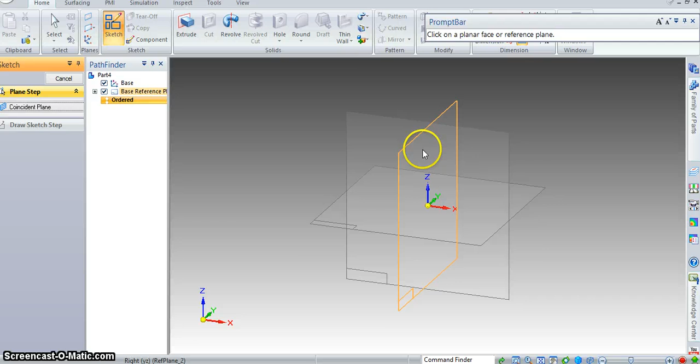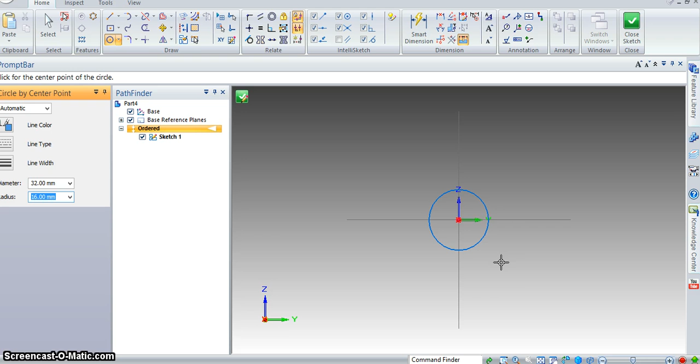I'm going to start sketching on this. I think it's 32. Yes, 32 and 16. Diameter 32. Let me zoom in a little bit.

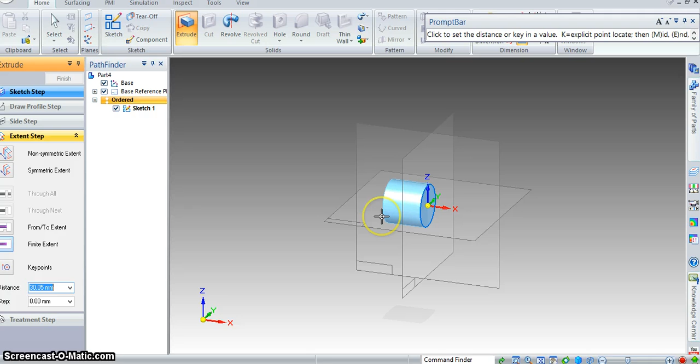Now I need to extrude this for 56 mm. I accept. Now, it's useful to have both cylinders in the center. If I make it so that it's 56 on this side, the second cylinder is going to come about here, and it's not going to be in the center at the origin.

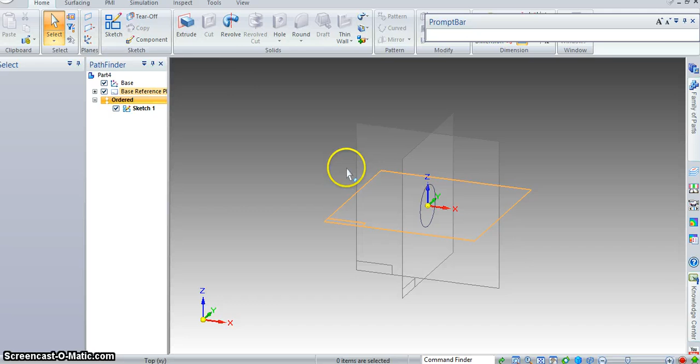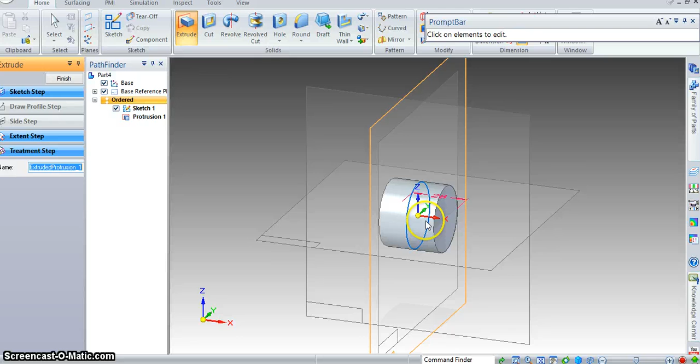So what I'm going to do is extrude it in such a way that it's symmetric. How you do that is this way: what's actually selected now is non-symmetric extent. I'm going to make it symmetric, and the distance I need is 28 on each half. I believe Solid Edge asks you to input the distance on each half. Let's see - no, if you see, the entire part is 28, and that's not what we need. So we need to input 56 itself as our distance.

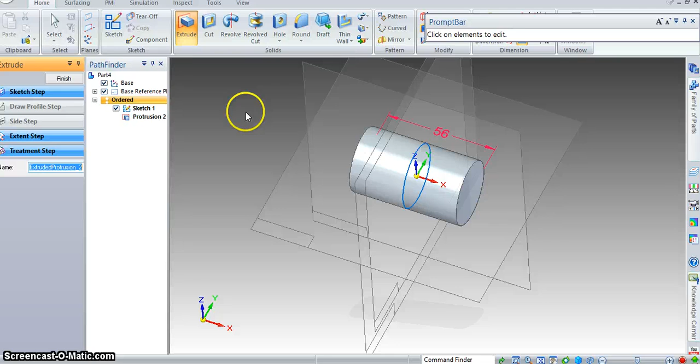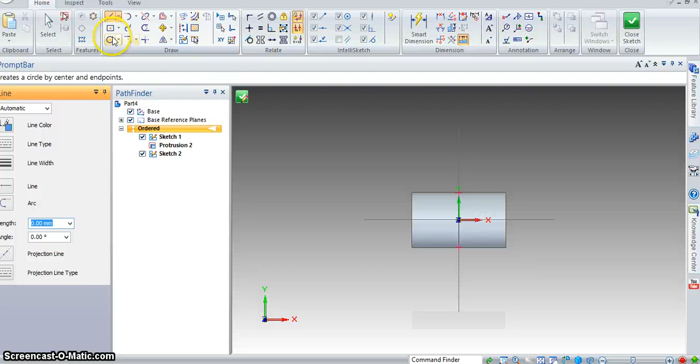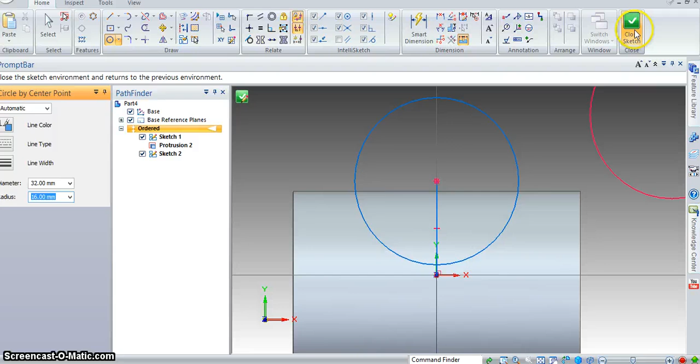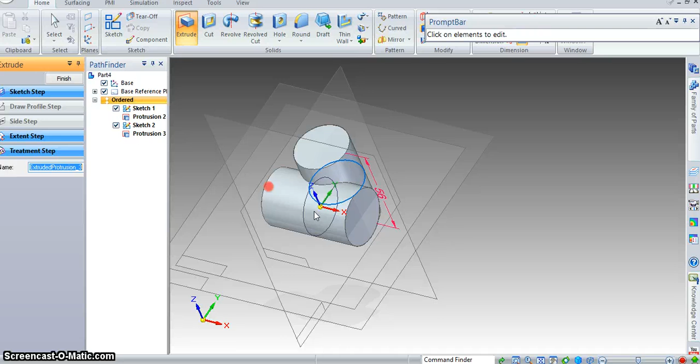56, but it's symmetric. There we go. That's one cylinder. The second cylinder is going to be perpendicular, so I'm going to choose a perpendicular plane, but it's at an offset, not at the center - an offset of 18 millimeters. So I'm going to draw a construction line in the center, 18 mm out, there, and that's our center. We need a circle with diameter 32, and I can go back to the 3D. Okay, do the same thing, except symmetric extent 56. Symmetric. There we go. That is what the center looks like.

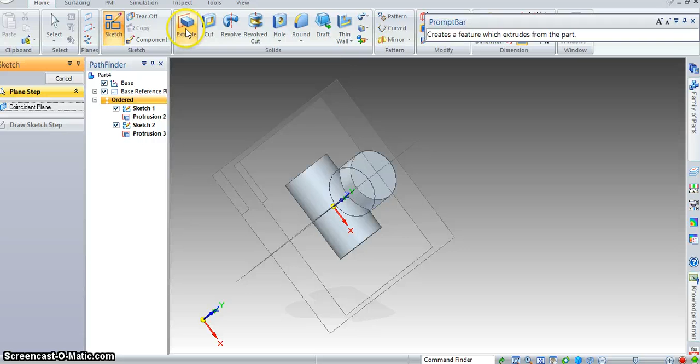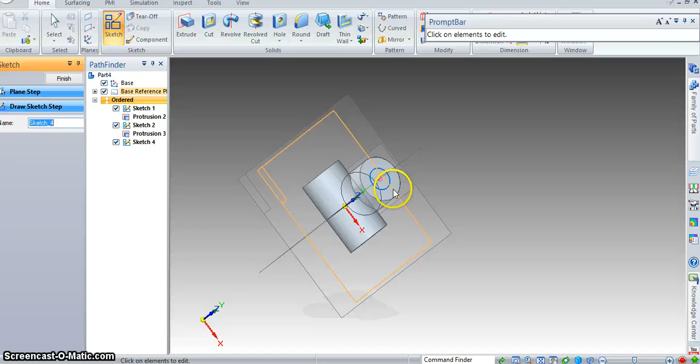Now we need to make the holes. The hole is going to be drawn on this plane. Sketch on this plane, circle of diameter 16. Close the sketch and use the cut tool. That's the profile. Accept, and specify that you want it till the surface. That's one hole done. The second is the same process.

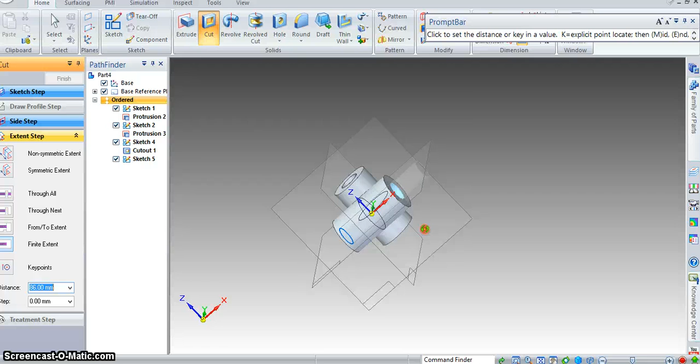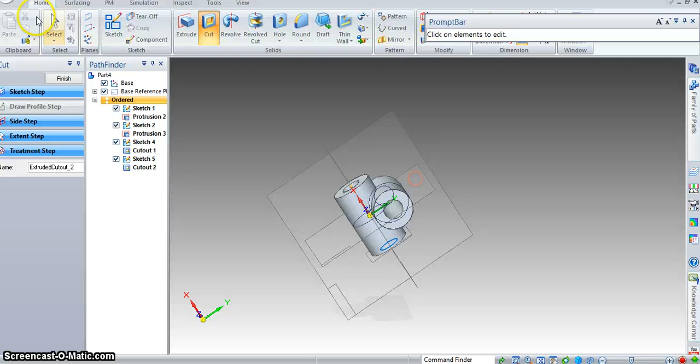There we go, I think we're done. Let's see - 32, 18, 16, 56. Okay, yep, we're done. That was part 2, simple enough. Again, when you're saving, make sure you name it what it's called, not part 4.

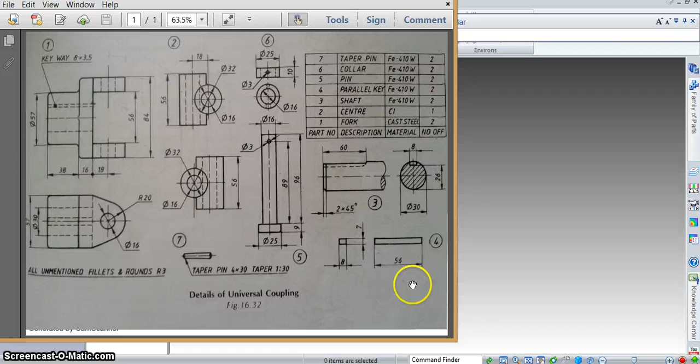Now for part 3, which is the shaft. This is fairly simple - it's basically just a cylinder, but with a rectangular keyway, just like the one we made for the fork. The shaft has a diameter of 30. The keyway is again 8 by 3.5, I suppose. Yes, 8 by 3.5.

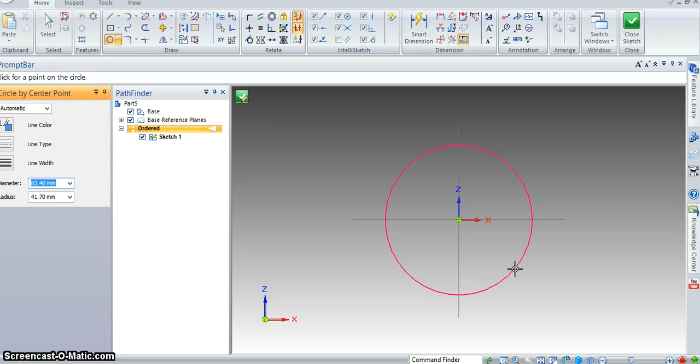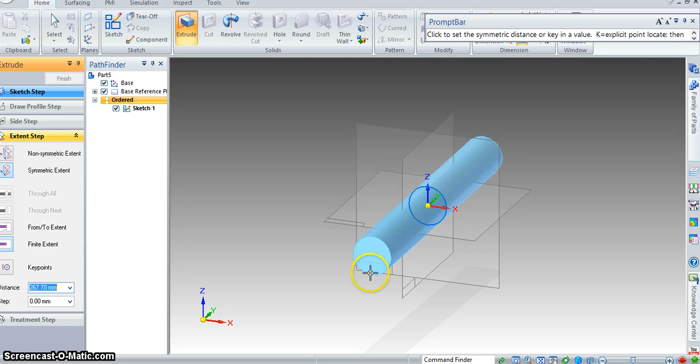Okay, so we can start off with this diameter of 30. Now, when I'm extruding, it doesn't really matter how long my shaft is because it's in symmetric extent form. It doesn't matter how long our shaft is because it's coupling two shafts, so I'm going to just say it's 100.

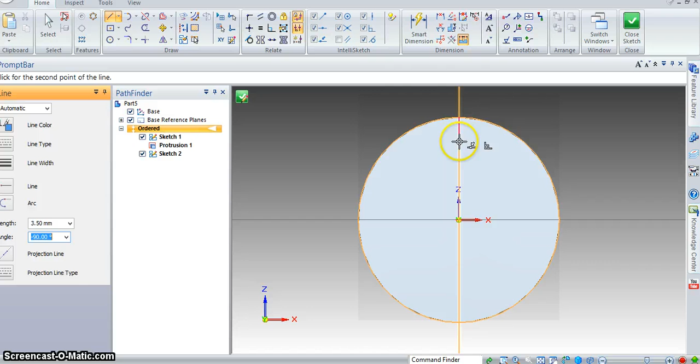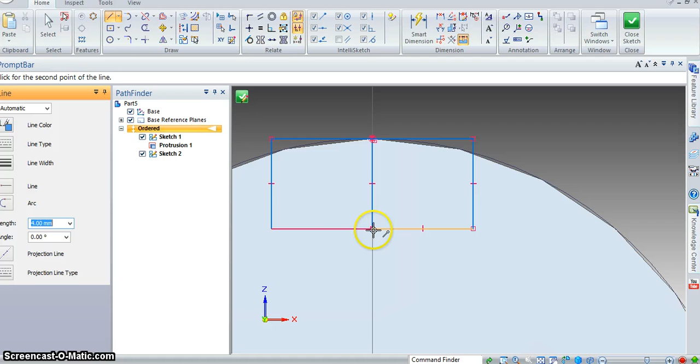Now, for the rectangular keyway, it's 8, 3.5. So if I wanted 3.5 here, I'm going to draw a line that's 3.5 millimeters long, radius, go 4 millimeters across because it's half of 8. Let me zoom in a little bit. Okay, make that 8. And that's our keyway profile. I need to trim this part because it's not needed, and that's it - I'm just going to cut that out now.

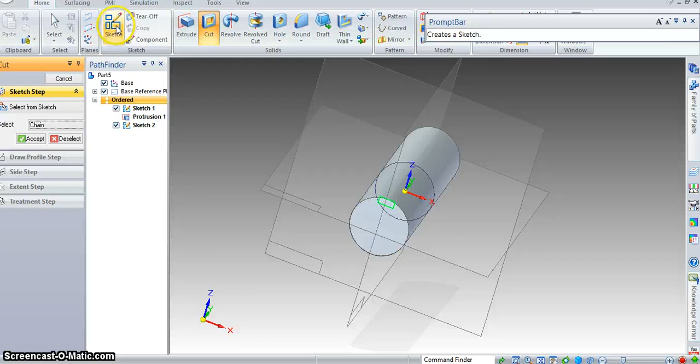Accept. I want it to that surface, edge of protrusion 1, and there we go. Oh, but that's not how it's done - it's actually only for 60 mm. Exactly, so that was my mistake. Cut, but only for 60 mm, on the side. There we go. In fact, I think there's a rounding off done here, but it's not really needed right now. And that's part 3.

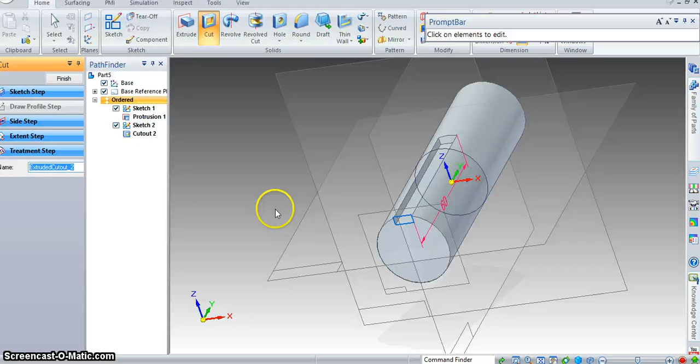I think the fork was the trickiest one, and once you're done with the fork, the rest happen pretty quickly.

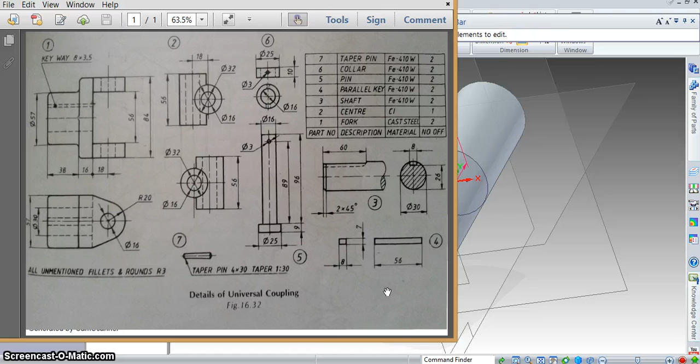Number 4 is the parallel key - this one. This is the side view, this is the front view. It's just a cuboid of sides 8, 7, 56. That should be child's play for us now, same as the shaft.

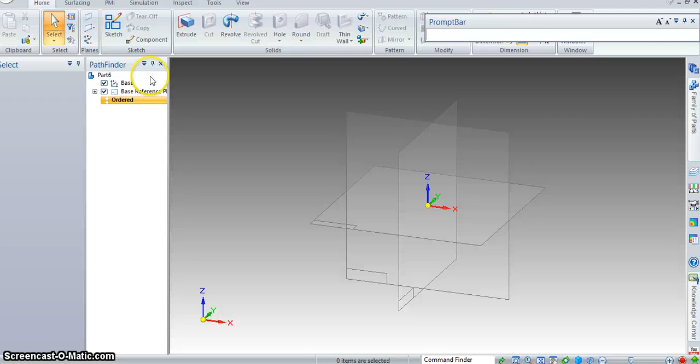New ISO part. I think in V18 and V19, there's no option as to how you start making the sketches - I don't think you can choose between ordered or synchronous, but in ST6 you can do all three planes at the same time. I'm choosing to do it in an ordered way so it's easy to understand. So in sketch, in this plane we need a rectangle by center.

Of width 8, height 7, and angle 0. Okay, there it is. And now I extrude it for 56 mm. That's our rectangular key - parallel key.